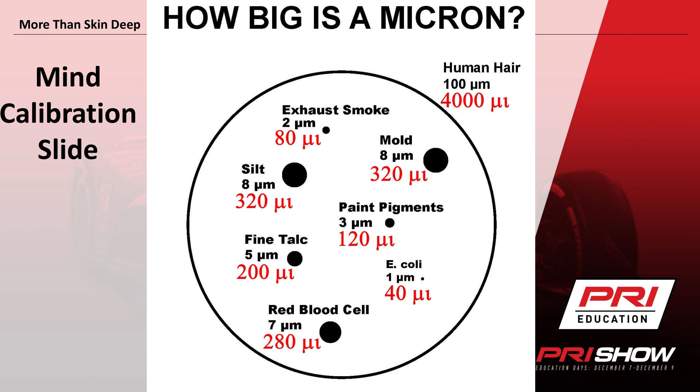So when you start putting that in perspective, a human hair is 4,000 microinches. Your red blood cell, a mold spore, or silt in a river is in the scale of what you're talking about - that 300 microinches plus or minus 150 microinches on one of these scales. Fine talcum powder, you're looking down to exhaust smoke area - not the big diesel particulate you see, but the little stuff that CARB gets mad about - is about 80 microinches.

You can't see this with your eye. So when people think like somebody picks up a valve spring and leaves their fingerprint out with the rust - well, that rust has totally destroyed that piece. Now you might think I'm saying that to sell more springs. Dude, if you touch it and get rust on it, you're going to buy new springs. I'm telling you this to keep you from having to buy a new set of pistons.

So when we talk about the surface, and we talk about grinding versus turning a piece, and we're talking about this scale of microns, we're doing that so we understand what part of it we're really talking about when we talk about the surface in this little tiny scale. So what part of the surface is the surface?

You look at this, plus 200 microinches, minus 250 microinches. You can see this whole trace - this is what you'd get with a skidless profilometer going across with the diamond, looking at the whole surface. You can see we have contour here, we have roughness, we have waviness. So you break it up and you can look at what's the roughness, what's the waviness, and what's the form. Now if you had a skidded profilometer, there's a water ski up underneath the diamond, so you don't see the form or the waviness, you just see the roughness.

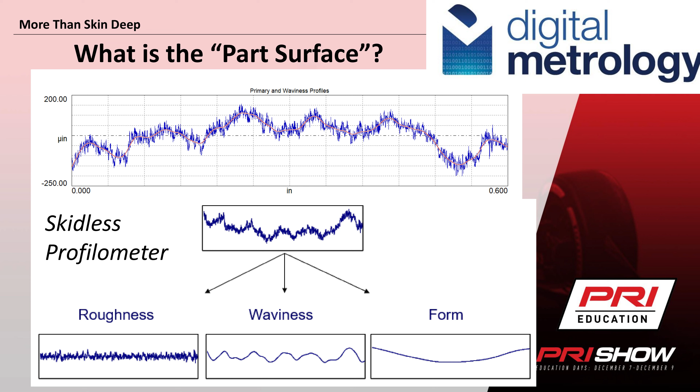There's a lot of information there, but remember, it's only 1/3 of what we talk about when we're talking about surface texture. And this is really big for decks - we're talking about gaskets and that kind of stuff. It's easy to use the skidded profilometer on a bore and get the information you need, but when you're talking about waviness on a deck, it's going to be really hard to see that. And that waviness on the deck is what's going to cause the leaks.

So I kind of did this up so you could get an idea of the scales of the three things. If you imagine that blue, dark, and light blue line, that's the surface of your part. You can see that the surface texture is up there on that dark blue line, broken up into the waviness and roughness. But then you've got the compressive stresses you might have left over from nitriding or shot peening, and those could go up to about 10 thousandths deep, but really most of it's in the first 5 thousandths.

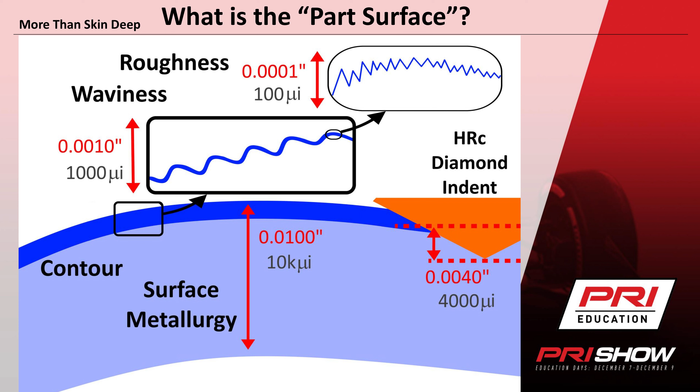Now what's amazing is when you look at HRC diamond indentation, something at about 62 Rockwell only goes 3 thousandths deep after it preloads, so it's probably about 4 thousandths total. So you look at this at 60 Rockwell, when you hit it, you've gone through almost all of your surface. It's kind of like trying to learn about the surface with the HRC gauge - it's like duck hunting with a 155 millimeter howitzer.

You might have killed the duck, but you'll never know. All we know is it's not there anymore. The feathers are gone. It's like, yeah.

So the biggest thing when you're talking about texture, and I know Mark hates it when I say this, there's way more to this than RA. RA can easily lie to you. And in my world of piston rings and cylinder sealing, that's the biggest issue - you can have very different surfaces with the same RA.

So that's why we talk about things like RVK. For me, you guys know me, I love oil. It's my best friend, it's your piston ring's best friend. You got to give it a place to be, and we're going to talk about that a little bit more as we go on. But you got to have a place for the oil to be.

Your RK, that's where the rubber meets the road. While that RVK is the valley, the reservoir, that's not where the surfaces are interacting. What's that load-bearing area? That's where the RK becomes really important.

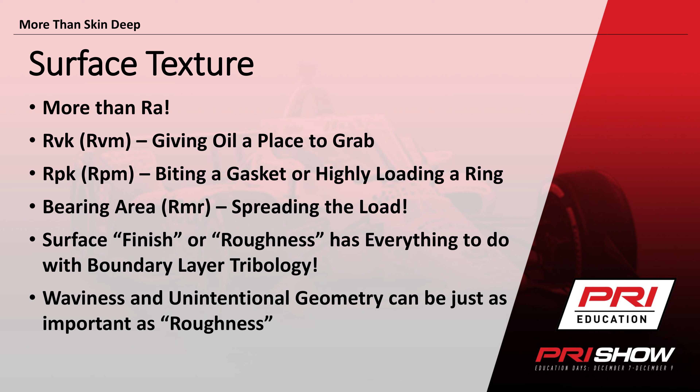And then you got things like RPK, that's the peak heights, that's the stuff that's going to probably turn into debris more times than not. So you got to be careful, because if you're generating a lot of debris, if you're trying to hone the engine while it's running, it can be pretty bad.

And you might need an RPK for certain gaskets, like some of these tri-layer, 5-layer, 10-layer gaskets - you want to have something to bite into it. So that RPK that's horrible on rings could be good on gaskets, and that's something weird to learn. It comes back to application, right? One you're trying to knock that peak off, and the other one you're trying to not be bad - something's got to have teeth and something doesn't.

So to your point, RA can fool us. This is the slide we talk a lot about in our honing classes - you get the same RA, roughly the same RA, from a 2.4 to a 2.5, but your eyes will tell you those aren't anywhere near the same.

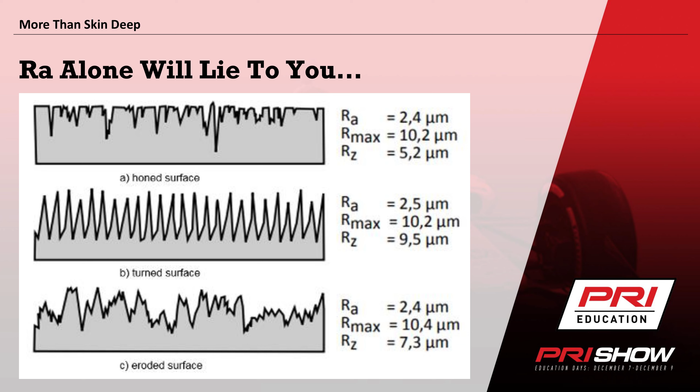No, and the load-bearing area will not be anywhere near the same. So it's really, really important to make sure we have a better way of defining and understanding that. That's really where we come back to the RPK, RK, RVK - when we use that, now we can begin to really quantify what we're doing and visualize it.

And we talk a lot about the numbers, especially when it comes to honing - what kind of RK do I want, what kind of RVK do I want. Those are good, but those are for sanity checks. You want to look at that trace, because that's the thing that's real. When that profilometer drags across that surface and creates that picture, the picture is the real thing.

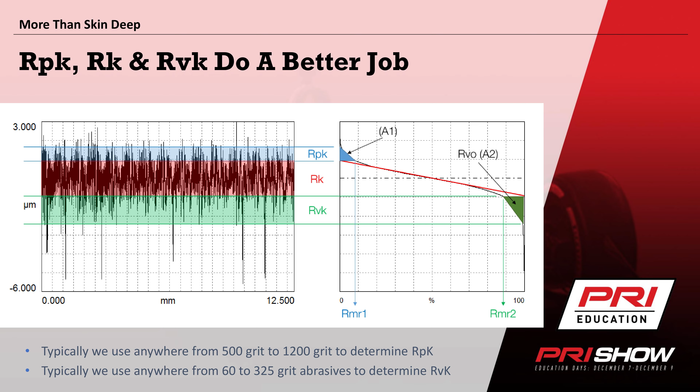Well, we say a picture is worth 1,000 words. I think the first time we were honing and started looking at this picture instead of 3 numbers that were just randomly chosen - before, when you'd hone a block, you could test your profilometer in 5 different places and get 5 different readings, because all you had were these 3 points in space you were looking at, and then suddenly we got this image that the picture tells the story.

I'm not trying to sell anything, but my friend Mark at Digital Metrology has that TraceBall software, and what it does is it starts making you look at the pictures. What's weird is if you spend about 2 or 3 years looking at the pictures, it recalibrates your mind so the numbers make sense in a way they never made sense before.

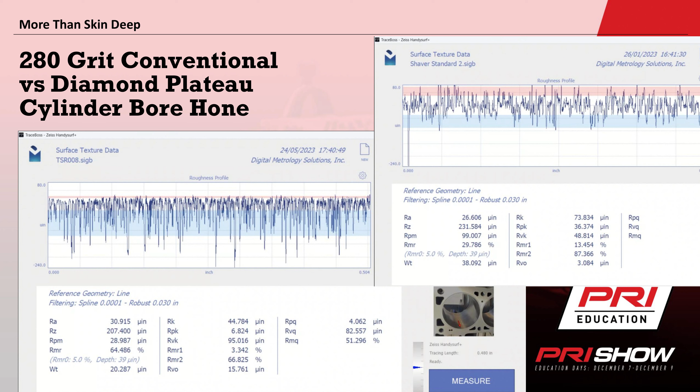So what's neat is when you take these kind of finishes, and then we put them back in our little test device, and we look at, well, how does it hold up over time? Well, that single grit finish on top, can you see much crosshatch left on that top one? Nope, because it doesn't last. Two reasons it doesn't last. If I don't have enough valley to begin with, you can't add it later. The other thing is, what happens to all those peaks? Where do they go?

We wish they would just go straight to the oil filter and not pass go, not collect $200. But the reality is they don't. So think about your conventional honing abrasives. Why do you have to change them so often? Because they wear out, right? Well, that silicon carbide or aluminum oxide that's in there, what's it doing? It's coming off. It's breaking down and is acting as a third body abrasive. Those peaks are third body abrasives being held by your oil, and you are basically polishing your cylinder. That's what's happening right there.

Now look at the plateau finish. Now, nowhere near as many peaks, run it for the same amount of time, and you can still see the crosshatch. You gave it the valley. It doesn't have to do as much work because now we have a closer to running surface to begin with, which is huge. And again, this is just cylinder stuff, but don't think for a second that all of this is about honing. It's not. There's so much more to this, right?

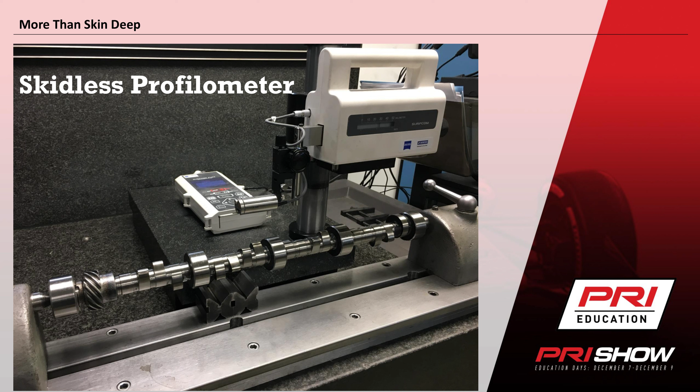We have a whole nother hour conversation we could have about that, but we won't.

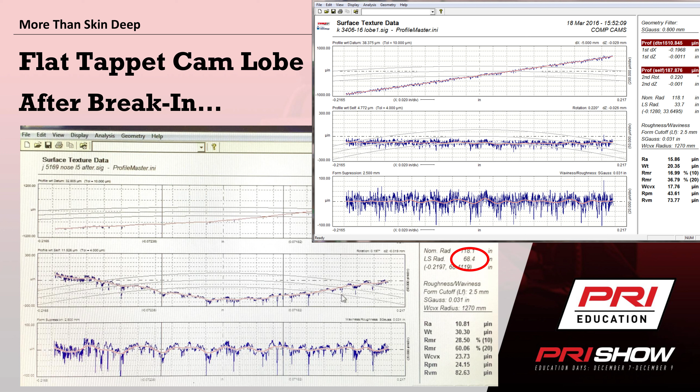Like, if you look at the gray lines in there, that's our target crown for a roller camshaft. But we knew that, hey, crown's great on rollers. Let's put crown on flat tappets. Well, you can see that a flat tappet really goes the opposite way. It becomes concave. And once you start understanding the geometry and everything, you understand why. Sometimes if you grind a camshaft and you see it's got crown and it's a flat tappet, you've got to throw that away or start over, because it's got to be flat. It will be really, really bad if you have crown on a flat tappet. Ask me how I know.

So when we talk about geometry, it kind of flows right into this. People talk about a cam and a lifter wheel, and this is for a roller, and you imagine it's a flat wheel and a flat cam lobe. Don't be embarrassed, out in the audience, to put your finger out like this and go, okay, if I push in like this, it hurts the knuckle, but if I crown that out like a Roman road or one of the aqueducts, it seems to work better. But that's not the way to do it. You should do flat and flat. Then you go roughness, so it looks like this.

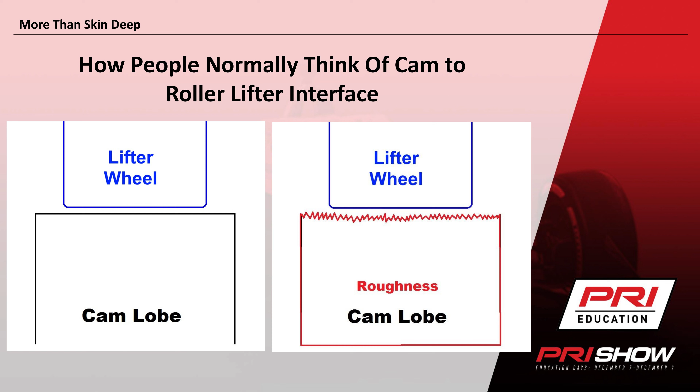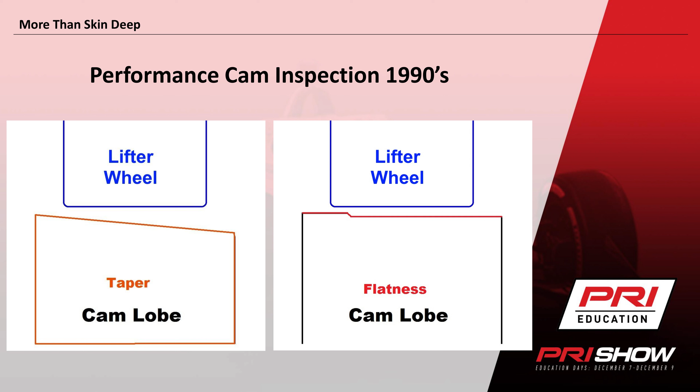But if you start thinking about it more, when I started work, we'd mic the sides of the lobes, and on roller cams, we'd look for taper, or look for flatness where the dress was. And you could just catch that, just run it over with a micrometer, and go, okay, that's bad, and you understand why it's bad. On both these applications, remember, what's a failure? When the microscopic loads are greater than the microscopic material strength at that location. What happens when you do that? Well, it puts high load on the left-hand side and it fails there. Duh, it goes boom.

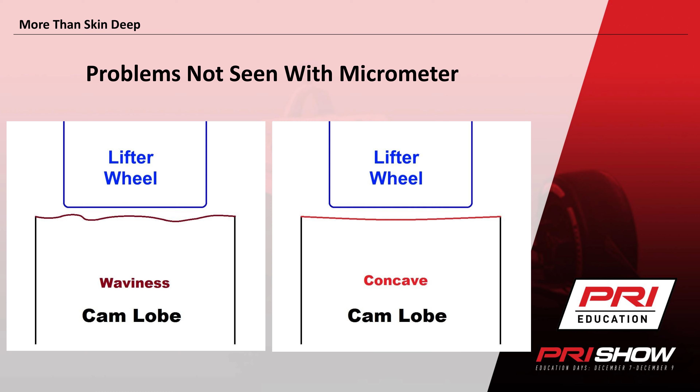But it can be really weird stuff too that's hard to see with the mic. If you go left to right and you mic the side of the camshaft and it has all that waviness in there, it's still going to hit those high spots. That concave camshaft, remember, so good on a flat tappet? On a roller, it's a guaranteed snake bite. That's why GM puts crown in there. So you start to deal a lot with surface contour, and this is our second sister. Only the loaded geometry matters. It doesn't matter what the geometry is with no load. It matters what the geometry is loaded.

And you see this so much with crankshafts. You guys see some of the stuff with more counterweights in there, more overlap. Because what happens is you'll bite the edge of a rod because the crank bends or something like that. And pin bores are amazing. The piston guys won't tell you all the secrets they use to get that pin bore right, so that under combustion pressure it spreads out those loads. But it's super important.

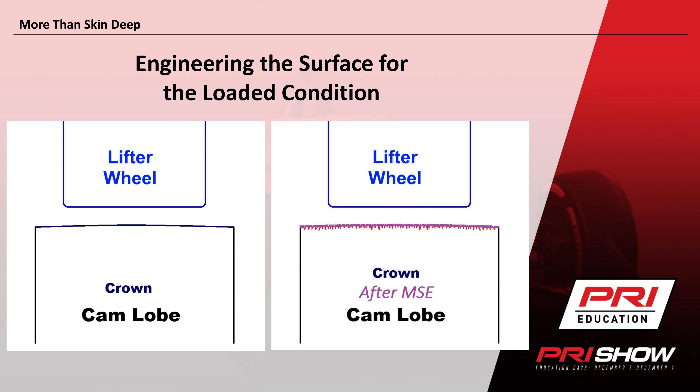So you can see what happened on the lifter side, on the cam side, this wasn't something that Comp came up with. I mean, Cummins was doing this for 20 plus years. GM started doing it in the 90s and put crown on the camshaft. But it's not just camshafts where it matters. Spreading out that load matters on everything.

Look at these 2 lifter wheels. That's for the exact same application. Which one of it, when it's loaded, is going to edge load? And you can imagine what you're doing. Think about this. This is a lattice. This is a bunch of iron atoms hooked up to one another.

When you go through that lattice with a razor blade like that lifter wheel on the right, it just puts a razor blade scribe in it. And that razor blade scribe creates a crack. That crack propagates and it blows out. That one on the left will actually run on the same exact camshaft. If you put half of these and half of those, the lobes on the left will last 10 times as long as the ones on the right.

There's nothing that's changed about the metal of the camshaft. There's nothing changed about the heat treat of the camshaft. There's nothing changed about the material of the lifter, and there's nothing changed about the heat treat of the lifter. This isn't a materials issue. This is an applied load issue. You don't care how much material strength you have, it's going to fail.

Right. One of our good friends that worked at Cummins, we were sitting here talking to him, and I was trying to figure out what material he ran. Because we'd done some cool tool steel stuff, worked with Carpenter steel, and it was awesome. And I was as proud as a peacock. I was probably in my mid-30s, and, man, I was strutting. And I came up to him and goes, okay, how many KSI UTS do you have? And he told me, and I was like disappointed.

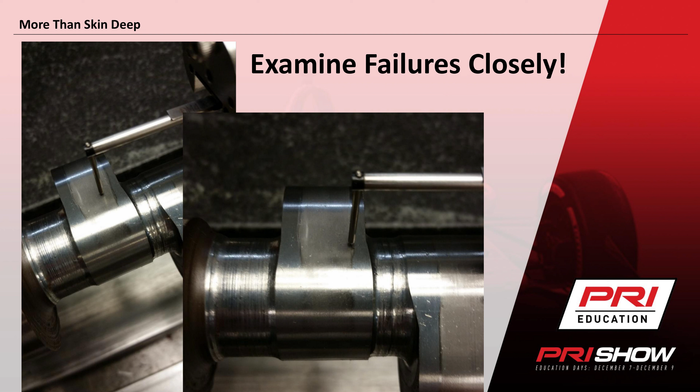So guys, pay attention to failures. They're telling you so much. Like this camshaft failure, what we talked about is measuring things before they're run and measuring things after they're run. Sometimes you won't have the opportunity to see it before it's run, but when it's run, measure it. Making data-driven decisions is kind of like the key to being a professional. Amateurs guess, professionals measure.

You get in here and you start taking this profilometer and you measure the camshaft that failed, and all of a sudden you see something like this. And you start looking under a microscope and you can see where the edges of this lifter, this thing had a flat dress on it, there's no crown, it had some taper in it, and you can see the side that had the taper high. Remember, a human hair is bigger than the room right now, okay? Your hair, I don't have many, but if I had them, they'd be bigger than the room.

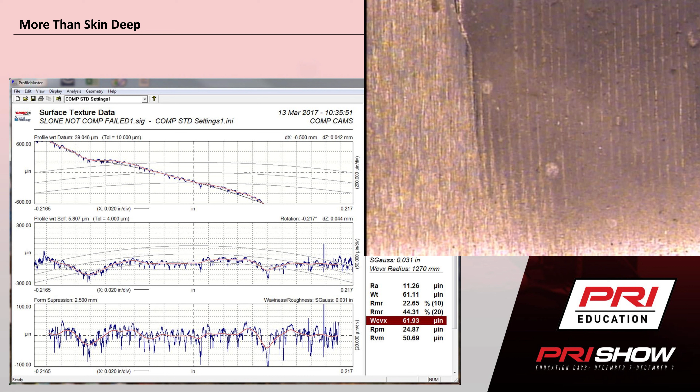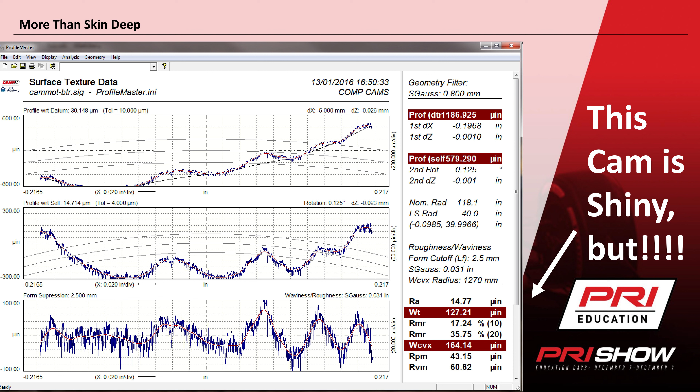You can see the dress in here. You can see everything about what was going on. You can see some oxidation in there. But you can see how that edge of the lifter did exactly what I said at the top of the screen. It put a razor blade in there. It put a scratch in there. And that is what caused all of the issues. And you can see exactly what's going on. People go, okay, well, I'm just going to polish the camshaft.

Okay, great. Well, this camshaft is absolutely shiny. But the problem with doing polishing is it's really easy to put more pressure in the center than on the edges. It's hard not to, and so what you wind up with is this bathtub deal. Now this thing was shiny as it could be. It was about a 14RA, so not great finish, but the waviness on it is 127 microinches. So top to bottom, you look at this graph, that's the average wave. You can see from peak to peak, it's going down almost 0.3 of a thousandth smaller in the middle than the outside. Now it's hell to measure that with a micrometer, but it's really easy to do it on a profilometer.

So stuff like that, just because you polish something, you might not be doing it right. You can see that this is GM stuff. This is a first generation LS1 on the very left, and then a modern LT on the right. And you can see that GM has gone in there and put significant crown in it.

Now, part of the reason they run crown is if you take an old 300,000 mile Chevy apart and look on the base circle, you'll see that the wear pattern's really narrow, then it gets wide in the flank, then narrow again, then a little wider on the nose. That's because they put a ton of crown in it. What they're doing with the crown is making sure that if they have some taper in that lifter or in that lobe, they're not going to bite that edge, because they know if they bite that edge, I'm dead. And you can notice if you look at the geometry, it's not a pure crown, it's actually got a little parabolic shape. It goes out more on the edges than it does elsewhere. So they were super sophisticated in this.

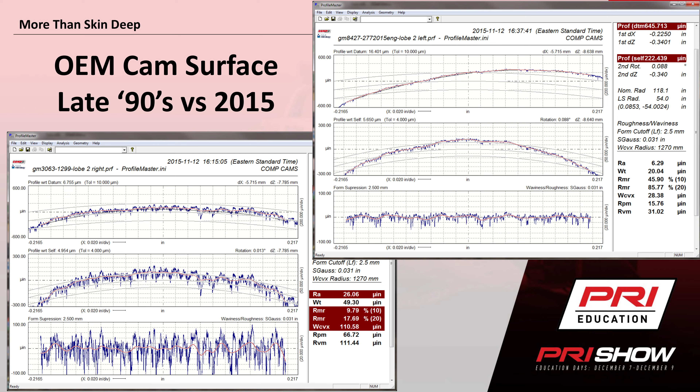But if you look from the 90s to today, what was kind of cool, I can walk over here, you can look at this little number, the RMR - that's the material ratio. You can see that on this camshaft they made in the 90s, at 10 microinches, it only had about 9% surface area. So imagine the snowshoe analogy - over here, only about 9% of the area of the shoe was actually touching the camshaft at 10 microinches. And at 20 microinches, it was only about 18%. But on the camshaft they made 10 or 12 years later, they've gone from 9% to 45%, and from 17% to 85%.

This is what my friend at Cummins was saying when he said, I've made mine a factor of 10 better. From 20, that's getting toward 5, 6 times better performance there. Well, it's like, how many push-ups can you do on your fingertips versus your palms? Especially from that whole cam, it's like doing fingertips on just my thumb and my pinky - you're barely doing any, right? That residual, it's pretty cool.

So one of the coolest things I was involved in with Comp is we started - before anything - I wanted to polish, and Scooter was, he's always Scooter, and he's like, if you can't grind a camshaft right, we're not going to try to make it right with polishing. And he was absolutely right about it. It's like, how good can you grind it?

So we started putting a little crown in it. Because our loads are higher, we can't run GM crowns. If we run the super high crowns like GM, we'll flake out in the middle of that track on the nose. So we have to spread it out and use more of the lifter. And then we have to hold our taper tighter and make our lifters better and things like that.

But what we find is, when we ground the first cam, we get this guy on the left, and you can see it's running about 6 RA, about 50% RMR at 10. But by the time you ground 40 camshafts between a dress, that wheel had broken down, and you're getting from 50% toward 20%. I'm showing Scooter this, I'm like, we can get a good dress, but it's hard to hold a good dress. Now, we still got excellent contour.

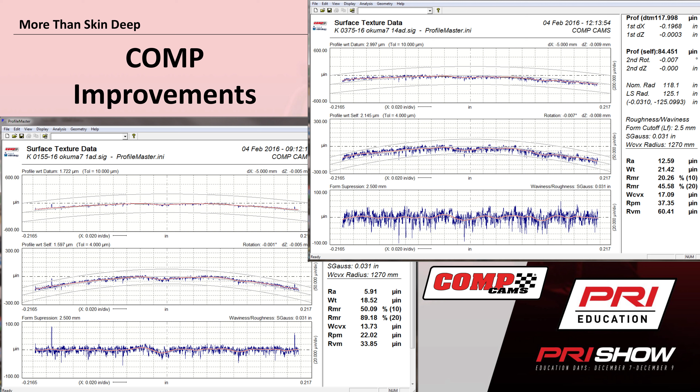When you've seen 80%, it's really hard to go back to 40%, you know what I mean? It's like the guy goes out and runs 12s, it's really hard to go back and run 16s. So what we did is we took that deal and found a way that we could grind the profile the way we wanted, and then after it was ground, go through and polish the peaks off.

Now the process that we go through here is kind of like mowing the grass. You can't go in there with a finishing mower if you're going to build a Major League Baseball park. You start with a bulldozer, then you get a grader, and you do everything. You lay down some dirt, you pack it down, and then you go with the finishing mower after you got the grass growing. And it can look awesome, I guess.

You can see that this finish was very much like that last finish, except now it's 55% at 10 microinches, and we're up to 95% at 20 microinches. So at 20 millionths of an inch down, you've got 90% of the surface area there to hold it. Compared to a camshaft of old that was 14%, the wear resistance on stuff like this is just amazing. Don't turn it over yet.

Okay, does anyone notice how similar that bottom graph looks to a honed plateau cylinder? Who wants to guess which came first, this or what we're doing with honing right now? This is where it came from, right? Because we were doing all this together.

Yeah, there was ideas that if we made a roller cam too smooth, it wouldn't hold oil and it wouldn't do this and it would skid and all kinds of things, and it was going to do bad. You know, trust me, I went from NASCAR, we did 60 millimeter journals and people thought the needle bearings were going to spin so high that it ignited the oil and blew the car up.

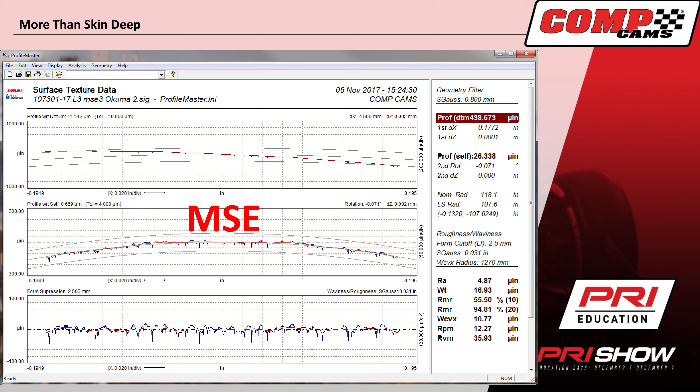I said, is the cycle time, stock removal, is it all the same? Yes. I said, I know your problem. He's like, what? I said, it's too smooth, right? And I reiterated the Gibbs conversation to him, and he's like, really? I'm like, yeah, you made it too smooth, right?

If you want to run it across, do 4 operations, that's fine, but do like 3 of them on the roughing machine and the last one on the smooth one, and create some plateau. And they had skidless profilometers and everything, and I was like, you need to create a plateau.

Came back about 4 months later, I got a package in the mail, a little gift box from them. And they said, all we did was follow your advice. We put it in, and it instantly passed the test and went over 200 hours with no change. They didn't change the material strength, they didn't change the geometry, they didn't change the heat treat. All they changed was surface finish, and it made that much of a difference.

It goes right back to focusing on the product rather than the process. So they were so proud of this process - we do exactly the same every time - but this wasn't producing the result that was desirable. Can I borrow that line? You can have it. You're going to hear that again.

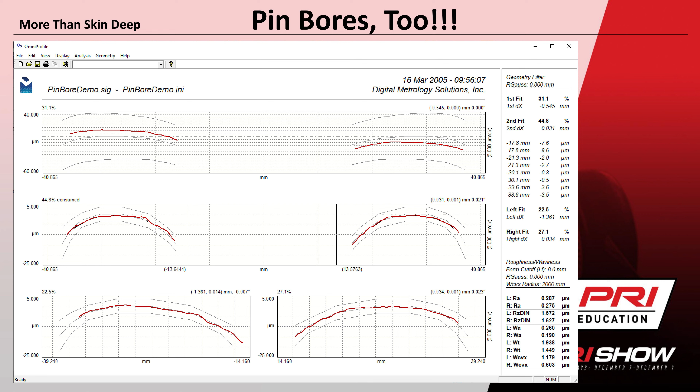So, talking just about the contour, like on the pin bore, just like he's talking about surface finish, you need contour too for the piston. Because once that combustion happens and the spark plug fires and puts all that pressure there, it's not what it is when you're holding it in your hand. That piston pin bore - and there's guys that will shoot me for showing this slide downstairs, so I hope they don't see it.

But that pin bore isn't a straight, perfect hole. A lot of them are designed with a shape to them, so when they're loaded it spreads the load out over that bore, so you're not biting the edges of the pin. You've probably seen that on some really good pistons versus some mediocre pistons - one of them's biting the pin at the edges and the other one looks like it's got really good wear. Why does this one look like this and this one look like that?

Well, somebody figured out how to spread those loads out. Like the crown on the cam lobes. Exactly, yeah, it's about trying to spread the load out.

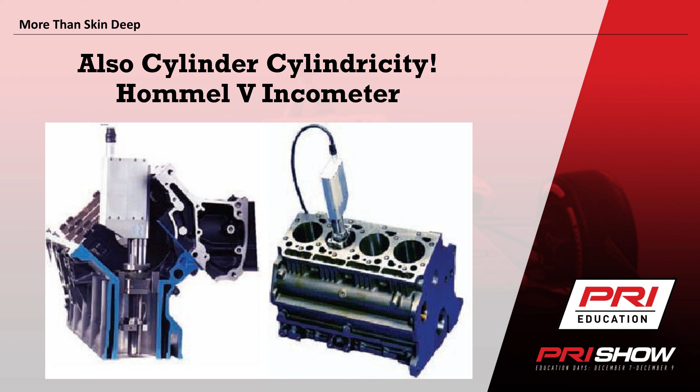And the same thing applies back to the cylinders, right? We talk about cylinder finish - you're trying to create that shape. Well, the problem is you can't measure that roundness with a dial bore gauge or anything that's only 2 points of contact. If we had a bunch of poker chips right here, you could get a mic out and measure them and they might be all real close together, but you stack them up and offset them, they'll all measure the same, but they're not straight.

So that's where you have to have a roundness tester to be able to do it. You can see the cylinder bore is round, but it's not always straight, and it's not always the same roundness. It's really about having that geometry right, no different than the pin bore or the cam lobe or anything else. For the cylinders, you want to have it as round and as straight as possible, and the only way to really do that is to have a roundness tester.

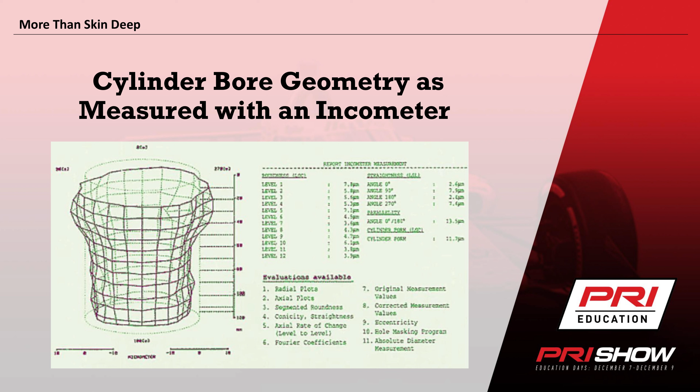Unfortunately, I guess they stopped making them now, and they're really kind of expensive anyway. But you do everything you can to try to figure out what's going on - stuff like an abradable coating, things like with those guys a couple days ago - you can see what's going on, read your parts, look at that inspection slide I started with. That's important because you can see that there are things where it's loaded that tell you things, and remember the guys that do the different strokes at the bottom and do the manual stuff with this. Now it's all CNC, but there was a lot of stuff going on there.

And that makes a big difference, right? Without having an incometer, the advantage we can do is say, okay, the modern hones, be it a Sunnen or a Rottler, the vertical CNC hones, when you put more abrasives in the hone head, you get a straighter, rounder cylinder. And fortunately, they've paid all the money to have things tested, so they can see that when you go from 2 to 6, how much rounder and how much straighter it is. And no dial bore gauge will show that.

Not just the number of stones, but also the vertical portion of not falling through that arc on the older style. That combination has given us much better geometry. Absolutely. And the machines are smart too, right? It's sensing as it's honing. Because they used to look at the little current gauge and go, okay, it's pulling more current, that means I'm taking more material off. If you watch Kazi do the hone job on a cylinder, he was watching that current like a hawk. Well, these machines can do that.

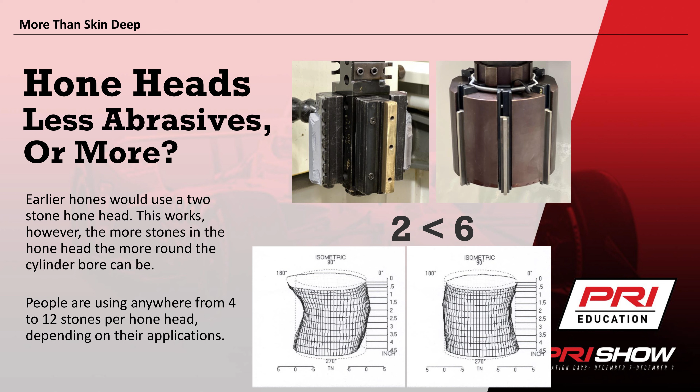You know, it's funny. It's not like there's a new technique. There's just new tools. And the guys who are experienced have been doing it for a long time. They can hear it and feel it, right? All the senses are factoring in. Well, the CNC is doing it through the sensors in there. It's feeling it and hearing it and seeing it too. And the other thing CNC has changed is the ability for somebody that didn't have 35 or 40 years of experience to produce results. You don't need to be 65 years old to do a good hone job.

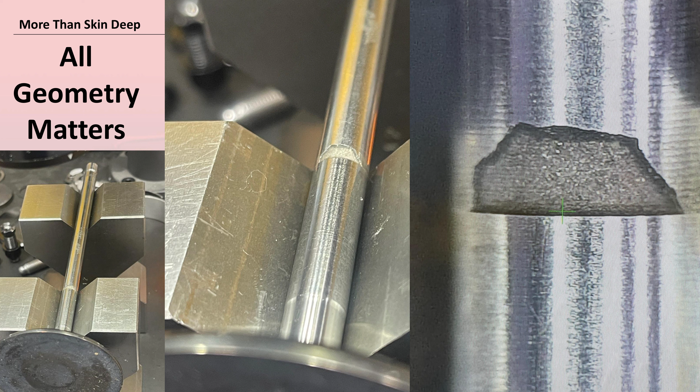Well, I really like this slide. This is one of my favorite ones. So all the geometry matters. You start, and I'll fill in the comments. Well, the whole thing is you're like, okay, geometry matters on the piston. But look at something as simple as a valve guide. What happens when there's a sharp edge on it? So this is a common failure that we see. This is looking at the titanium valve here with the moly coating on it.

The interesting thing when we first saw it was, wow, it's got this perfect break in it, and then this rougher one at the top, and you go, why is that happening? We see this happen at the bottom of the valve guide the most when the spring is out of control and we get a lot of valve bounce. As you have clearance between the stem and the guide and it doesn't come back on the seat concentrically, there's a bending moment there. And the moly is hard and brittle, so we see that chipping right at the interface where the Ti stops and the moly starts quite often.

You can see the wear above it versus below it, what part was in the guide getting worn down, what part was sticking out, and exactly where it got up at max lift and it bit it. And this is the thing: you might not all be able to buy a profilometer, but there's a lot of microscopes out there, some super good ones. If you'd worked with me for 20 years, you would not imagine how much time I spent looking through a microscope, just to see what the heck is going on. Because these surfaces want to tell you.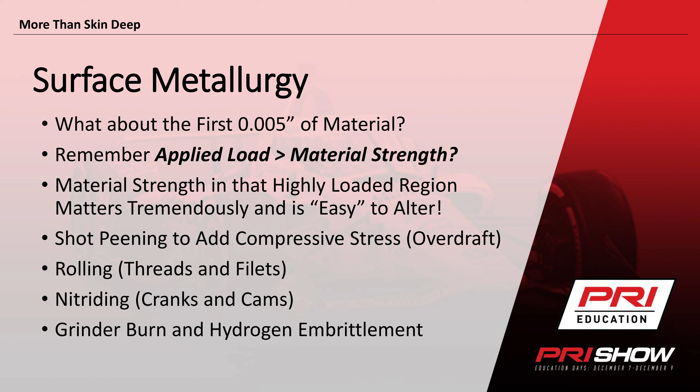The ways to add compressive stresses are nothing but overdraft protection. You know, we all have checking accounts, right? Well, you can get a third or more of your balance added to it. For that compressive stuff we talked about, 150 to 350 KSI, you can add 100 KSI of material strength. So it's like adding 30% to your balance of extra overdraft protection.

The ways we normally do that: shot peening, you see rolling, you see nitriding. But we can also take away from it. You can take away through grinder burn. You can take away through rust, any oxidation. You can take away with hydrogen embrittlement. So Chris Osborne, I want to thank him for this slide. PAC sent this over. It's the best illustration I've seen about what shot peening is.

So what we're basically doing is taking a small steel shot, accelerating it, and bombarding the surface. By the way, if you take a valve spring and somebody goes, oh, I want to save a few pennies, I don't want any shot peening on it, you'll knock down the life by a factor of 10, a factor of 5 by not shot peening it. So it increases the internal stresses, and that's that overdraft protection.

Steels generally, you can't smush steels into failing. You actually pull them into failing. Now you think on a camshaft face, well, I'm just pushing on it. You're pushing here, but then you're pulling on this lattice here, and that's where the crack happens. So what we're doing is compacting the material, moving the atoms closer together by this process. This little steel ball comes in here and it smacks the surface, right?

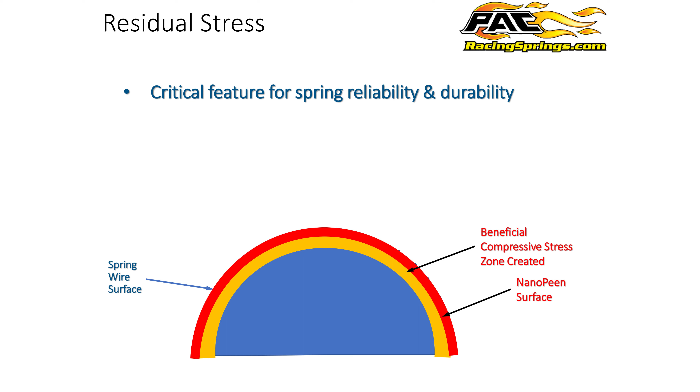A great analogy for that: we're here in Indianapolis. The guys at Oak Ridge National Lab in Knoxville, Tennessee, have this particle accelerator. It's pretty cool. Yeah, it is really cool, right? To get an idea of the space between atoms, let's go even smaller. What's the space between an electron and a proton and a neutron in an atom?

So if we imagine a hydrogen atom, smallest one on the scale, and it's the size of a softball, and we say, okay, proton, neutron, they're together right here at Monument Circle. Do you have a guess how far away the first electron is? Six miles? Try Knoxville, Tennessee. That's how much space is inside everything, because everything is made up of atoms. Except for subatomic particles, yeah.

Sorry, I'm a nuclear physicist by education, so I apologize when I get really geeky about this stuff. You can't tell from the accent. Yeah, they thought I was there on some sort of EOC deal, oh, you're a redneck, okay. I passed my comps though.

So, you go in here and you keep hitting it, and you hit it.

And what it does, it creates this beneficial compressive zone. It does it throughout the whole wire. Now, a spring is nothing but a big torsion bar. It's just a torsion bar wrapped around itself. So as it's running, the stresses are on the outside. And it's really the highest on the ID of the spring because it's a smaller radius there.

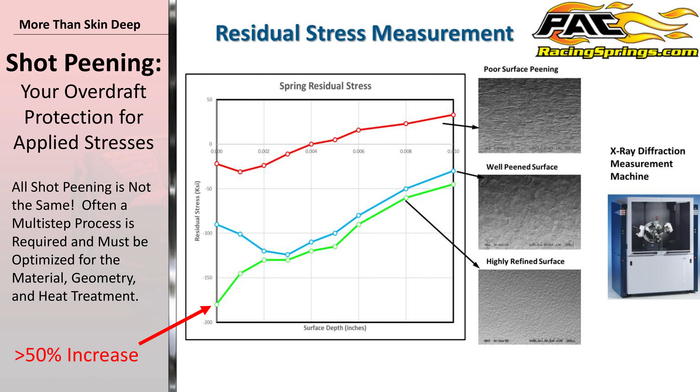But even stuff like, you look at the guys at Blueprint, Norris Marshall, they build these 383s, and it's really a neat piece. But some of the stuff they do for industrial is very budget-oriented. So what they found out is some applications we can just run a cast crank, some applications have to have a billet crank. Well, they found out that there's some applications where we can take this cast crank and we can roll the fillet and we can run more power.

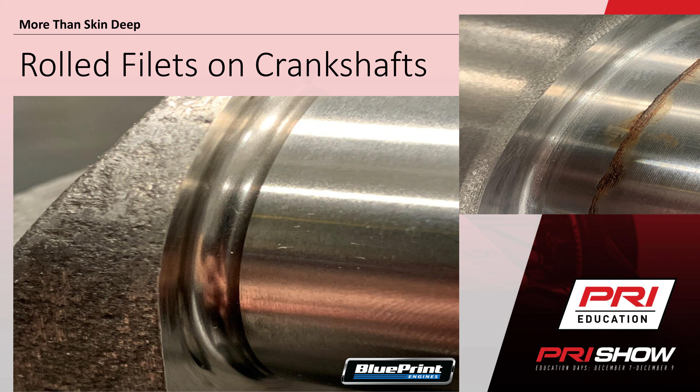So the one on the right's a normal crankshaft without the rolled fillet. The one on the left is the rolled fillet. Look how much better the surface is as you burnished it in with rolling that fillet in there. But not only have you burnished it and made the surface finish better, you've created these compressive stresses. And the guys did some stuff that was pretty cool with that.

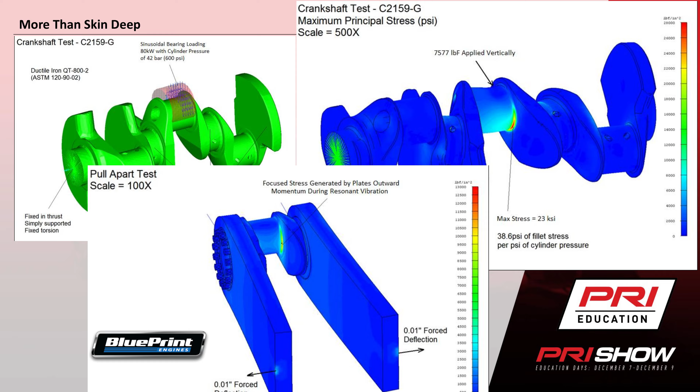They actually took their in-cylinder pressure measurement, stuff that Ben does, and they went ahead and measured to figure out, okay, what's the pressure on this crank? And they modeled it up there on the left to figure out this blue. Well, what's the applied force on it? And figuring out crank failures by running engines, I don't know if you guys know this, but it's kind of expensive and ugly and uses up fire bottles and all kinds of bad stuff.

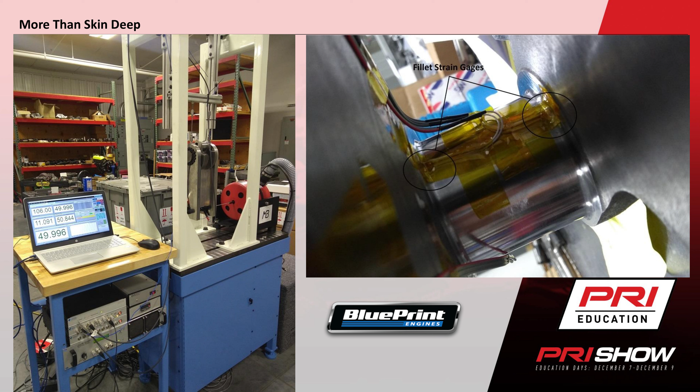So what they did is they had some people come up with this deal that has like 2 tuning forks. It's 2 big steel plates on a crank, and they cut a section on it. They bolt these on it, and they drive it with about 10 thousandths of deflection at real high frequency. And it creates that same stress in that fillet that you would in a running engine. And they can correlate back and forth from cylinder pressure to how they drive this tuning fork to actually model exactly what's going on. And it's just a cool piece because they go in here with all the strain gauges, make sure it works. And there it is over on the left.

And what they'll do is they'll have a bunch of cranks that are done and have the fillets rolled. And each time they can go in there and run it and check on what it does. Now they even have a metallurgy lab where they can section the cranks and they can go and check the hardness with a micro hardness gauge in that fillet and look and see what the compressive stresses are in the fillet too.

So it's been a real cool thing to work with them on the rolled cranks. At Comp, we did a whole lot of stuff on plasma nitriding. Same thing, instead of hitting it with shot, now we're taking nitrogen atoms, and we're linking them together, and we're accelerating them into the surface. And some of them go deep in the surface like arrows.

That deep in the surface like arrows is that transition zone, and it can be up to like 10 thousandths deep. Then you have the diffusion zone where it comes in there, and it might be 2 or 3 thousandths deep. Then you have the compound zone where they kind of lay on top. That's often called the white layer, and it's only a few tenths deep.

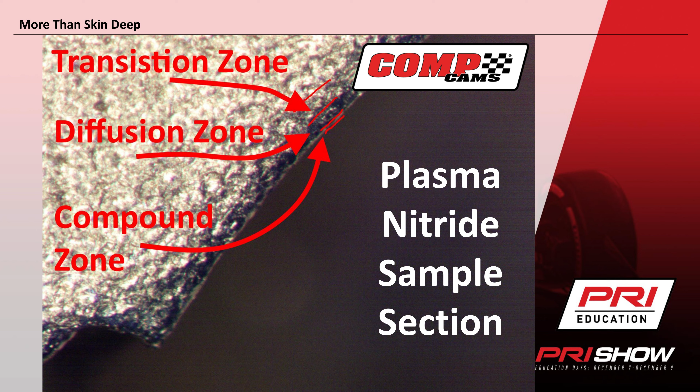So this is a rocker arm that's been nitrided that we've sectioned and mounted so we can look at what's going on with the different zones. And each zone is harder and softer, but it's added that compressive layer in there, and it's made it stronger. That's why you see nitrided crankshafts. You're like, okay, well, Billy, you can do good things. How about bad things? Well, that's absolutely the same.

When you're grinding a camshaft, it's really easy to put heat in it with a grinding wheel. And you can see, like, EPC helped me with this. This is like for industrial engines, and to see what's happened to the structure, the easiest way to do it is to do nitric acid. And nitric acid will go in here and change the color of it. And so the process is called a nital etch.

And you can see after they run the nital etch, you get that lobe that looks like this nice gray over there. If you have made it either harder through making it really hot and quenching it, or softer by burning it, by getting it hot and tempering it, it will change the color. And so you look at this next one, you can see put nital etch on it, and it will go in there and turn black.

Now, if you're just a dude racing and you think you might have a burnt camshaft, you don't have nitric acid, you can buy it by Pace, by the way, if you want nitric acid pre-mix and everything like that. Pace Technologies, I think, are Arizona.

But you can go over to a glass bead cabinet, and if you shot it with glass bead, you would see that that part that looks black there would be soft, would look duller. And the reason it looked duller is because the glass bead would have gone deeper in the surface because it's softer, and show you that soft area in there.

My friend Mark Eisler, he works at Hendricks now, he was at Sterling Performance, and he used to get all his camshafts glass beaded. And he believed that the glass beading was letting the lifter grab better, and that's why they ran better. What's funny is I'm going, well, that's not it. So I start going out there and watching them, and when they were glass beading his camshafts, they'd see where they were burnt, and they'd go back and re-grind them and grind the burn out.

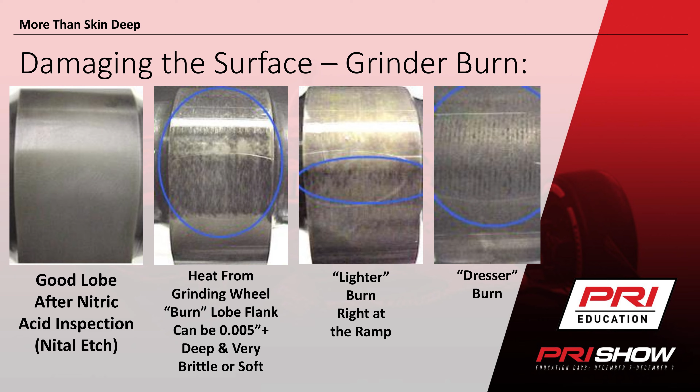Working with Roush Yates, sometimes they get environments where coatings can have a lot of hydrogen in them. And the hydrogen, like nitrogen, can make the surface actually stronger. But it also makes it brittle like glass. And so these coupons, when they did one type of coating and tried to pull it apart, you can see how it didn't stretch at all.

The part didn't pull out in tensile and then break. It just snapped. But if you did a different coating, you could get it where it would pull apart. So they wound up having to do coupons with their coatings to make sure they didn't have hydrogen embrittlement. So there's a lot of things.

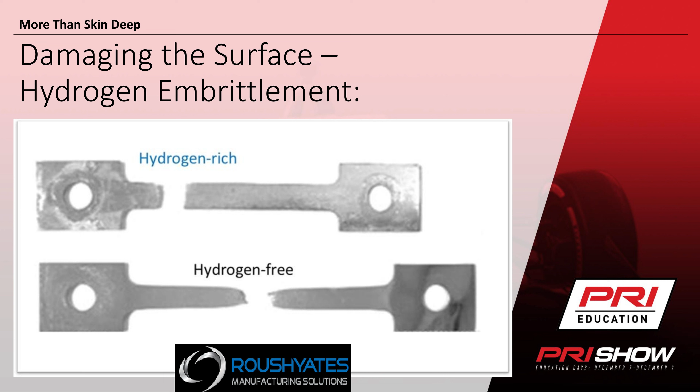Just like that, you can wind up with rust on your hand. You can do all kinds of things that hurt the surface and make it weaker. You haven't changed the global chemistry. You've only damaged the surface, and it causes a huge deal. Do no harm. Okay? Yep. Yeah, handling of our parts is just as important as how much effort they put into making them, right? Mm-hmm.

If y'all are going to polish something or coat something, if you're going to do a cryo treatment, anything like that, talk to the manufacturer. Start understanding what you're doing, because you can really mess something up. Buying a microscope, buying a profilometer, looking at what's going on. If you're going to go into super finishing, understand your super finishing. Not all super finishing is the same.

There's super finishing that's done with electric. It's always something to do with the kinetic energy. You've got to get energy in. Some people do electric. Well, electric's going to do some damage to the surface. Some people do the acid. There are some materials that you don't hurt at all by acid etching. But with high carbon materials, you'll leave carbides on the surface when you acid etch. So kind of understand that. Some of them are kinetic energy.

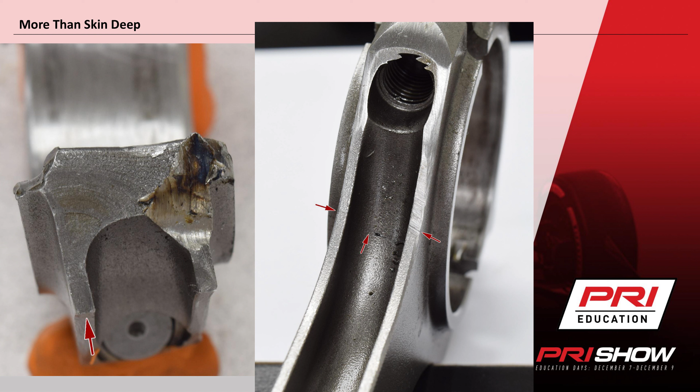I love this shot that our buddy Nick sent. Do you want to go through a little bit of this? Because we've probably all done this, right? Clearly this guy sent this rod back to Nick at Callies and said, this is crappy material. Why did your rod fail? So, you guys have all seen this. You grab the rod, you put it on, and you go, oh no, it hits something. It hits the cam lobe or it hits the side of the block. And so what you see here is where he started grinding on it. And you can see very clearly where that crack started because of where it was ground.

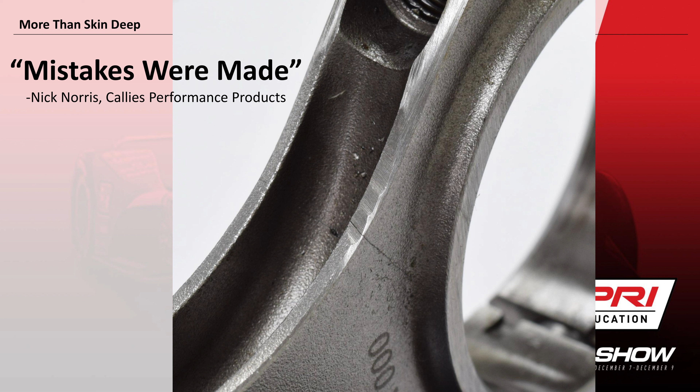Mistakes were made. Look where that crack is right there. Perpendicular to the stress. Yes. He created a perfect, like when you perforate paper in elementary school so you can rip it out, this guy had perforated rods and was totally clueless. But they told him, expensively. You can see it follows that angle exactly. So mistakes were made. We can only hope lessons were learned. We can't guarantee that, right?

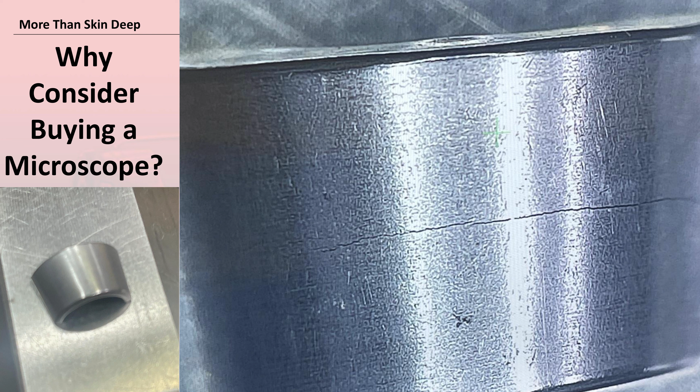What had happened was, I was making runs on the Spintron, doing checks, and you take a spring off and just check everything. When I went to put it back together, it just didn't feel right, when you pull the retainer up and everything. Something just felt weird, and I looked at it, I couldn't see anything. So as I went to put it back together, I figured it's free to take this over and have a second look under the scope. I about fell off my chair when I put that thing at 20 power and started to focus and zoom in.

So a $10,000 or $12,000 microscope saves a $40,000 or $50,000 catastrophic engine failure. That thing was one or two runs away from all the magic smoke coming out. Yeah, absolutely, so we try to look at everything.

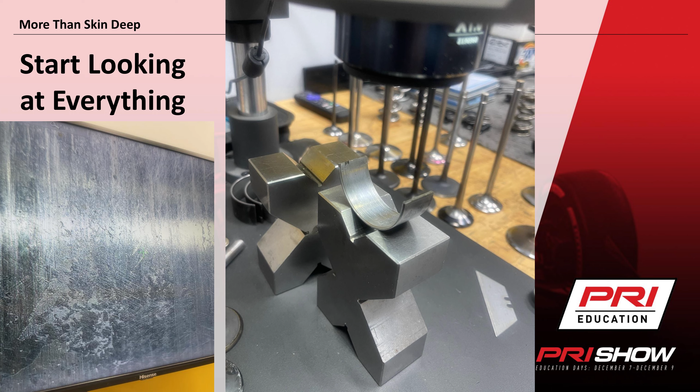Here's looking at some bearings, and like I said, we looked at valve springs. Here's a great valve spring failure we had last year, or the year before, on Robbie Blankenship's car. We'd been running the same setup for quite some time, and these were good, expensive springs too. We're talking almost an inch of lift at 10,800 RPM. I mean, a pretty serious thing.

They wanted $150 a set. And so this is one of those things where, all of a sudden in the middle of the season, we start randomly having spring failures. You got to scratch your head and go, why? What changed, what's different? So I sent this to Aaron White, and he got some of these images for us.

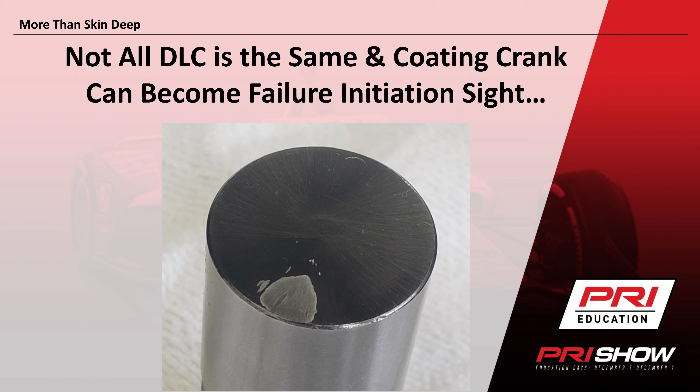So you talked about DLC, right? Well, unfortunately, in this one you can't look at it under a microscope and find it until after it's failed. I'll just put it out there, as the slide says, not all DLC is the same. There are single-layer DLCs, multi-layered DLCs, doped DLCs. They all vary.

Just because a part is DLC'd doesn't mean that if you've had success using, say, a DLC-coated wrist pin, that you can go use that same DLC on a cam lobe or something else and it's going to do the same thing. It absolutely won't. It's a big variable here. And the surface has to be right, like you see this failed because there's too big a chamfer on the lifter, but the lifter itself was too rough to begin with.

So if you put a hard DLC, it's about 3,000 Vickers. The hardest steel is less than 1,000 Vickers. So paper, rock, scissors, it's going to win. You put a DLC on a rough surface, it's a cutter.

The other thing is the DLC is really hard, so most of the parts, you can't just DLC every material. You can't take a cast iron cam and a cast iron lifter, put DLC on it, and think it needs to work. It's not hard enough, it's going to try to flex. You wind up with these really high-end maraging steels that have been nitrided to try to get up close to that 1,000 Vickers, and they put like a 1,500 Vickers layer with a titanium nitride before they put DLC, and they put a DLC 3 before they do a 4, to try to get that hardness to be a spectrum instead of a single jump.

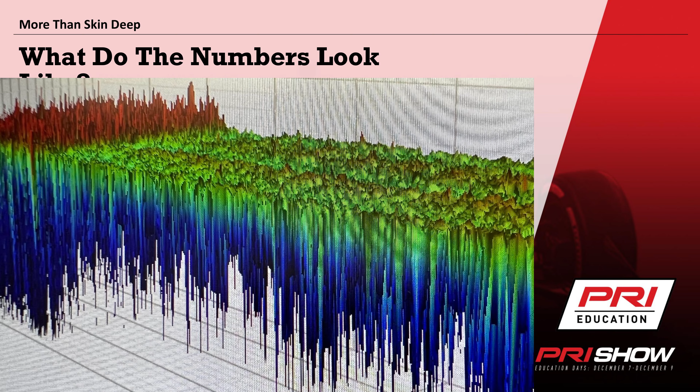Mark's already left, so we can make fun of him—tell him his math isn't right. Actually, I'll pay you to record it and tell him his math's not right, just to watch him twitch. He's the nicest guy ever and he's not going to want to cuss, but he's going to want to—it'd be so much fun to watch.

So what you're saying is the valleys are all still there? Yeah, it only wears down, it doesn't wear up.

So I've seen a lot of DLC-coated flat tappet lifters coming available, and I'm wondering if there's any different steps you need to take for break-in procedure on that, or any cams or materials in cams you want to avoid when selecting a lifter like that—say you're running a flat tappet. So what kind of material?

Honestly, it winds up where you can do almost anything. The Cup guys all did their camshafts out of PM M4 tool steel, or some maraging steel and nitride—really hard stuff. For lower friction they'd even DLC the camshafts. So you'll hear these rumors, people say you kind of run a tool steel—no, you don't. The reason they had to do that is because they were running 600-pound open springs with 2.2 to 1 rocker arms, which does multiply the forces, so they were seeing 5,000-pound pushrod loads. 5,000-pound pushrod loads would not work on cast iron. But if you're running the same cam profile, the same rocker arm, and the same valve spring, you can run the same cam material with DLC lifters that you could with the flat tappet.